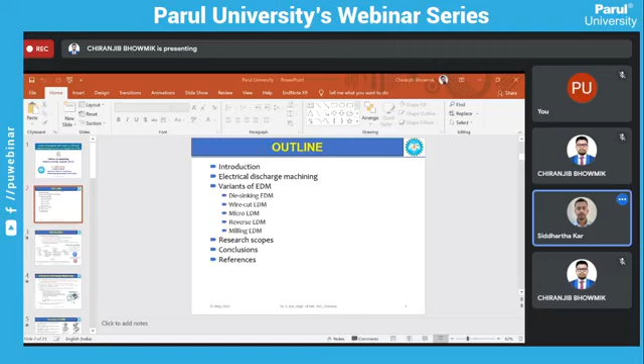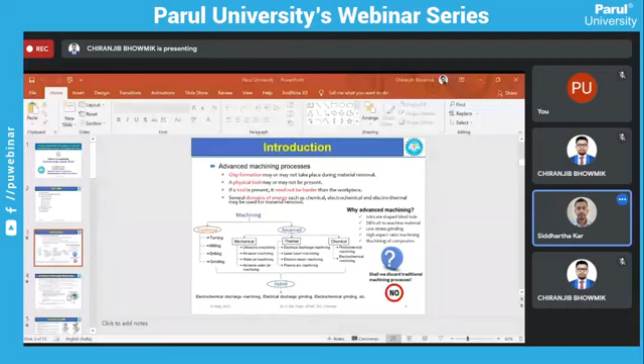Next. Is it visible? No, presentation mode is not active. Slides are visible, but it is not in slideshow mode. Right now visible? No, it is not visible to me. Sir, can you present yourself from your mobile or whatever your device? Okay, I'll try, yeah sure. Wait. My screen is visible. Yes sir, screen is visible. Okay.

Okay, so by advanced machining process, what do we mean? There are few important characteristics that differentiate advanced machining process from the conventional one. The first one is that chip formation may or may not take place during material removal. There are few advanced machining techniques such as laser beam machining and electron beam machining, where we don't find the formation of chips after material is removed. Now there may be a physical tool present or not, but in all conventional machining techniques, a physical tool is a must, and it should be sharper and harder than the workpiece.

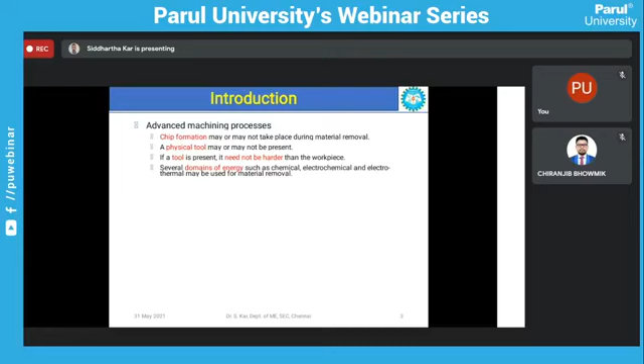We can distinguish the several machining techniques in traditional and advanced, as given in this pictorial representation. In traditional, we see common techniques like turning, milling, drilling, grinding. In advanced category, under three domains of energy - mechanical, thermal, and chemical - we see several processes. These processes can be clubbed together or hybridized to get complementary benefits of each other, so that machining efficiency is increased.

So several machining techniques are nowadays hybridized together, like grinding hybridized with electrical discharge machining becomes electrical discharge grinding. Then electrical discharge machining combined with electrochemical machining becomes electrochemical discharge machining. They are hybridized so that they complement each other, achieving higher efficiency in machining.

Now, why do we go for advanced machining? The answer is given in these five points: first, intricate shaped blind holes. If complex shaped holes are required in very tough and hard materials, it is not possible by conventional machining techniques, so we have to go for advanced machining techniques.

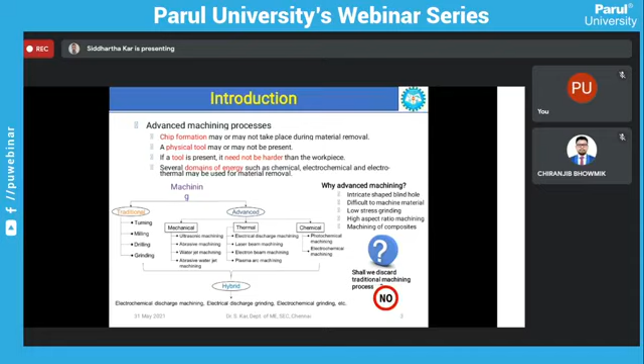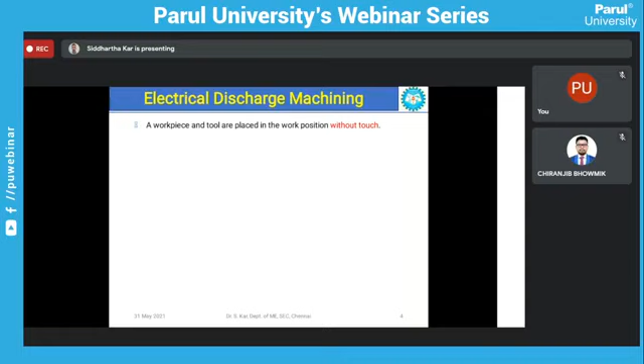Now, electrical discharge machining is basically a non-contact process where the workpiece and tool are placed in the work position. The tool and workpiece are separated by a gap known as the spark gap or inter-electrode gap. This is the operating principle.

As we can see, at the top side is the tool and at the bottom side is the workpiece. They are connected by a pulse power supply, and a sufficient gap is maintained so that spark can occur between them. The gap is filled by dielectric medium, which is used to ionize the gap. Whenever sufficient ionization energy is reached, it emits electrons, and when a channel of electrons forms, a plasma channel is created. When the plasma channel breaks, a shock wave is created where material removal takes place in the form of craters.

One important thing is that pulsating current flows between the power source, workpiece, and tool - a continuous power supply is not applicable in EDM. The main idea is to give sufficient rest to the working mechanism so that material removal may take place.

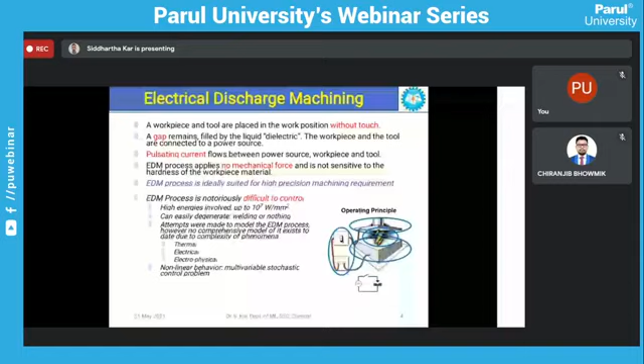It is very difficult to control, because the energy associated with EDM is very high. So it is very difficult to predict the working mechanism, or how much material erosion takes place under a given criteria. It is very difficult to predict.

It can easily degenerate to welding or nothing, if the process parameters such as current, voltage, pulse on time, pulse off time, the dielectric used, and the electrical and thermal conductivity of the workpiece and tool materials are not properly adjusted. If the adjustment of all these parameters is not beneficial for healthy generation of sparks, then the machining will not take place.

So it is very important that we select the process parameters such that proper machining takes place. Whenever we intend to do ED machining, we have to select the process parameters such that proper machining takes place. Otherwise, there will be no machining.

It is very difficult to model the EDM process. Basically, in every machining process, to establish some model or to predict something - that is, how much material will be eroded if we apply a certain combination of process parameters, how much material will be eroded, how much accuracy we can achieve.

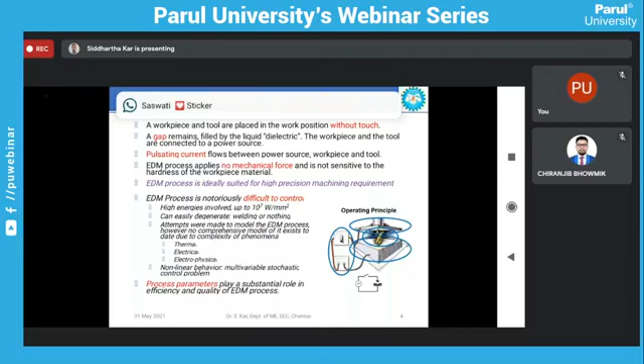Because we know in EDM, whatever process parameters we apply, there is the occurrence of overcut. So suppose if we use a tool of diameter X, then the outcome in the workpiece will be X plus delta X. This is a basic limitation of the EDM process.

So we have to play with the process parameters according to our requirement. Basically, we have to go for a trade-off between higher efficiency and higher accuracy.

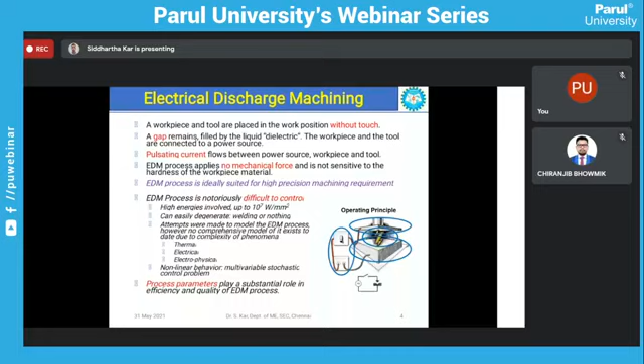There are several variants of EDM. Among them, die sinking is a basic variant of EDM, where the required shape is formed negatively in the metal or another conductive material using a three-dimensional electrode. So here we can see from the diagram, the impression of the tool is seen in the workpiece. Whatever shape the tool has, that shape will be reflected on the workpiece.

Then wire cut EDM, here the tool is replaced by a wire. We can manipulate the direction of the wire and create complex shapes or cavities in the workpiece. Then there is milling EDM.

Then there is reverse polarity EDM, which works on opposite polarity, with the motive of imparting more material removal from the tool material. Basically, in the EDM process, as we can see from the diagram, the tool is connected to the negative terminal and the workpiece is connected to the positive terminal, so the ultimate intention is that more material should be removed from the workpiece.

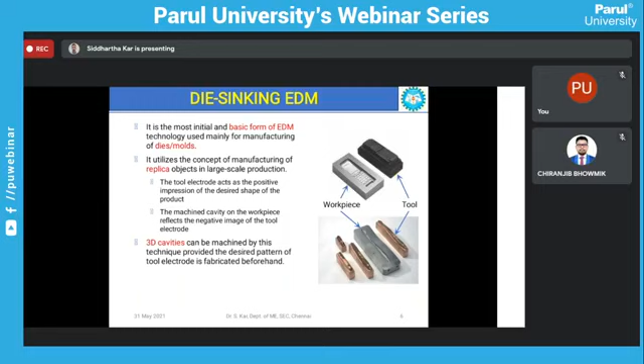Then wire cut EDM is used to cut metal pieces, where a thin wire is used as the tool electrode. Generally, two types of wires are there: consumable tool electrode and non-consumable tool electrode. The non-consumable type is used again and again till it breaks or till its lifetime finishes.

Then the pulse energy of wire cut EDM is generally high in comparison to micro EDM, but less than die sinking EDM. So wire cut EDM can be used to machine both macro cavities, and it is also used to machine micro cavities.

Then a wide variety of features can be machined by controlling the tool path movement. In wire EDM, if we can control the tool path, we can machine the shape which the tool covers. So any type of shape which we can feed to the tool, that is the wire, we can get that type of shape in the workpiece.

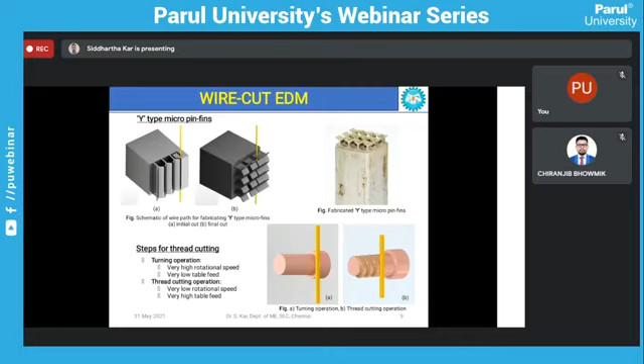At lower discharge energy, the effective unit removal of material is very less, leading to shallow craters, whereas at higher energy these craters prolong. Material is eroded in the form of crater formation in the workpiece. So with lower discharge energy, the crater size will be shallow, but if we increase energy, the crater size will be increasing. So to do micro machining, the crater size has to be minimum, and this can be achieved by supplying lower discharge energy.

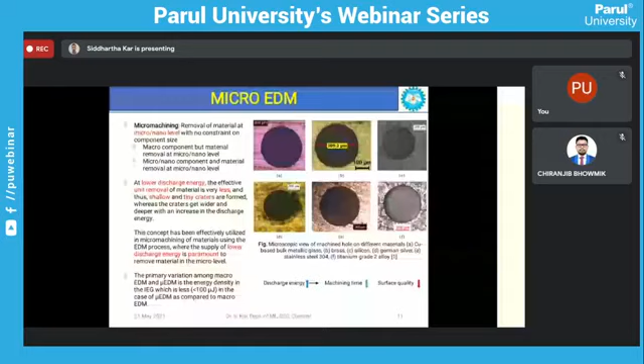Milling EDM uses a lateral movement of tool and workpiece in the EDM environment. Basically, a rotating tool is used, and it is first given a Z feed, equivalent to the drilling process, and then with that Z feed it is moved laterally in X and Y directions so that the intended shape can be machined.

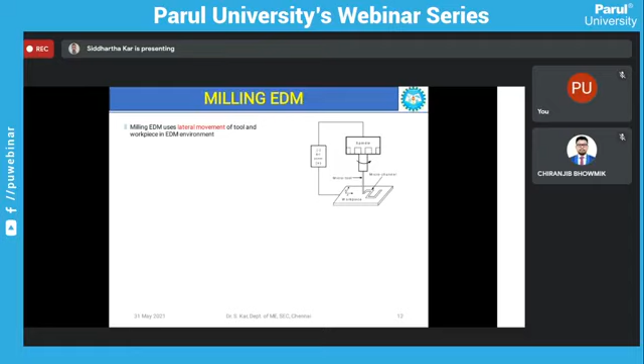The milling process eradicates the use of a structured tool. As we have seen in die sinking EDM, if we want to machine a complex cavity, first a complex shaped tool has to be fabricated before the actual machining process. But in milling EDM, a simple cylindrical tool can be used for machining complex shapes.

From the schematic diagram, we can see that at the start of machining, the tool length is, suppose, X, but at the end of machining, the length of the tool decreases. This is basically due to tool wear that occurs in each and every EDM variant. So we need to find ways to compensate this wear so that higher dimensional accuracy can be attained.

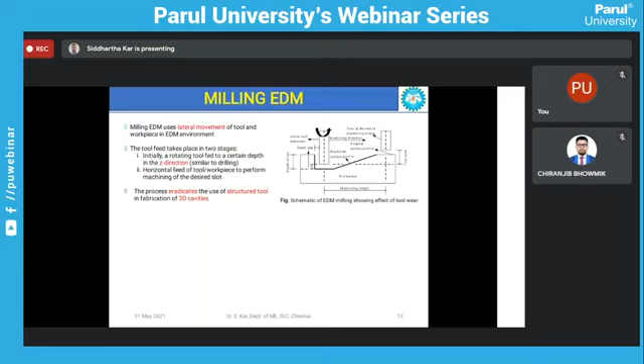In these workpieces machined by micro EDM milling process, we can see that at the start side of the milled slot, the length and width of the slot are as per our requirement. But at the end side, the length is very less and the width is also almost diminished. From the top view, as the milling slot progresses from left hand side to right hand side, the width of the slot starts decreasing, and will diminish.

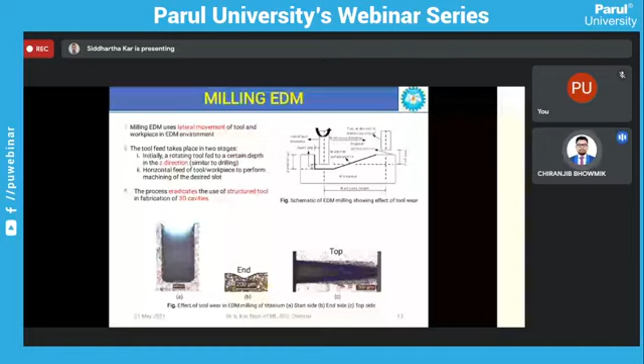Hello, Siddharth sir. You are not audible right now. Is it okay now? Yeah, right now it's okay. Previous slide I have to tell. Yeah, just go through a few things from the previous slide. Milling EDM, tool wear, that thing you discussed. Figures, remaining figures. Whatever the figures A, B, and C. Okay, so sorry for the disturbance.

To compensate tool wear, a simple technique of to-and-fro layer machining is used. Here, suppose we give a certain amount of Z depth at the start of the layer. To layer means we go from left hand side to right hand side, machining a slot from left to right with a certain depth. Then again, that equal amount of depth will be given from right hand side to left hand side.

By this technique we can compensate the wear of the tool that is occurring at the initial to layers. So by the fro layer we are compensating the initial wear that is occurring in the to layer.

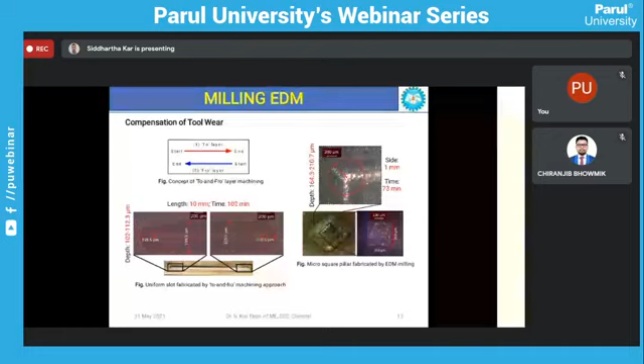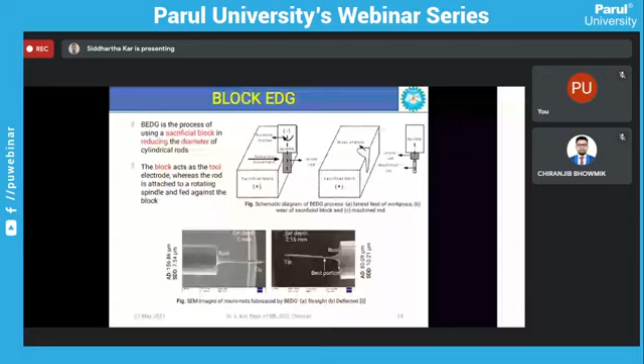Utilizing this technique, two micro rods have been fabricated. In the first one, the left hand side figure, a set depth of 2 mm is used, meaning the rod is fed for a total depth of 2 mm against the block.

Here we see an average diameter of 156.86 micrometers is achieved, and the standard deviation in diameter, from the tip of the tool to the root of the tool, is only 7.54 micrometers. This suggests that block discharge grinding can be used to fabricate very precise

micro rods. The set depth has been increased from 2 mm to 2.15 mm. We see the root portion has been bent and the tip is also deformed. This suggests that the tool has some mechanical contact, although the EDM process is non-contact.

There is very little gap between the workpiece and the tool, and moreover dielectric is also supplied, so chances of mechanical contact are also there. So we have to choose the set depth very accurately in order to fabricate micro rods with higher efficiency and without any failure.

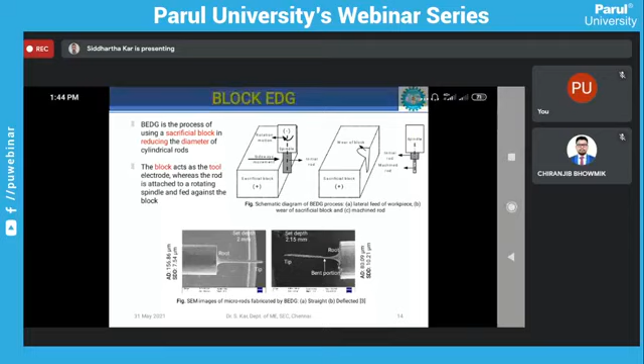Then the concept of reverse EDM is that the workpiece, in the form of a bulk rod, is connected through the spindle, whereas the tool, in the form of a thin plate sheet with micro holes, is kept on the work table.

Then again, against the same hole, if we feed a bigger size diameter rod with reverse polarity, meaning the rod will be connected to the positive terminal and the plate with the hole will be connected to the negative terminal, more material will be removed from the rod, and hence we will get a rod of diameter equivalent to the hole that was previously drilled.

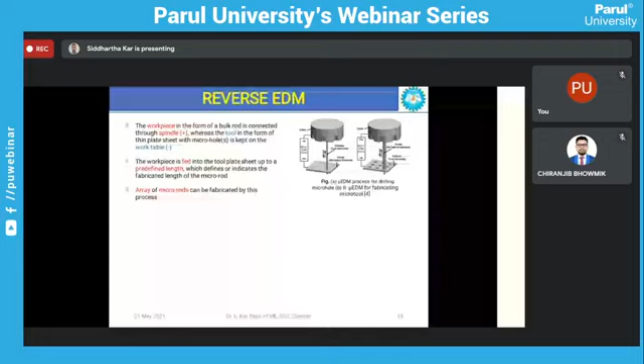But here we cannot apply rotation, it has to be just movement along the Z axis. So here we see that an array of 4 micro rods have been fabricated with the help of the reverse EDM process.

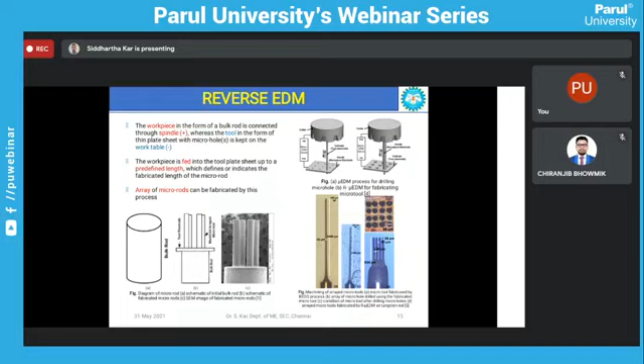And here also we see that a rod of 3.4 mm length and 55 micrometer average diameter has been fabricated, and arrays of rods have been fabricated by drilling holes with the initially fabricated rods.

Now the same reverse EDM can also be utilized for modifying surfaces. There are two important reasons which make EDM suitable for alteration of workpiece surfaces. These are that tool erosion is inevitable in EDM. Whatever compensation we use, whatever process parameters we use,

tool wear is bound to happen. And along with tool wear, the formation of recast layer in EDM is paramount. It has been seen that after erosion takes place, the material gets resolidified, and this resolidified layer is nothing but the recast layer. So these two phenomena have been utilized in a positive manner so that the surface of the workpiece can be altered according to the materials of choice.

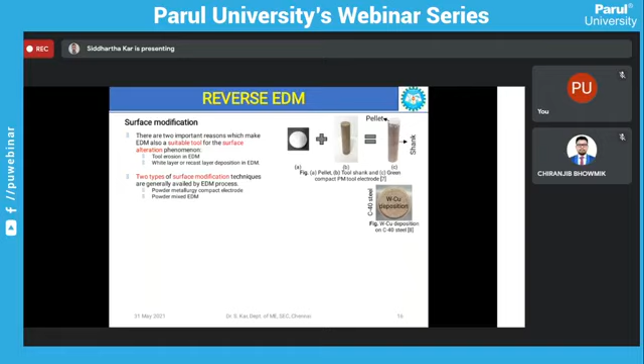In the powder metallurgy tool electrode, the pellet is composed of the powders that we intend to deposit over the workpiece surface. This is an example where tungsten and copper have been deposited successfully over C40 steel. We can see that a very thick layer of deposition has taken place over the steel surface.

If we see the phenomena of surface modification by powder metallurgy or powder mixed EDM, as represented by these several bubbles, we have the workpiece particle, the electrode particle, the powder particle, and the carbon atom. The carbon atoms are basically dissociated from the hydrocarbon oil, which is the dielectric medium. Dielectric mediums, hydrocarbon oils such as kerosene and EDM oil are used. Carbon atoms get dissociated from the dielectric fluid after it undergoes ionization, and these carbon atoms are also deposited over the workpiece and tool surfaces.

So basically three distinct layers are seen in the workpiece of the EDM process, as we can see from figure C. The first layer is the recast and oxide layer, then the heat affected layer, then the base metal. Material from the tool end, as we can see from figure B, will dissociate due to the formation of spark, and they will directly fall over the workpiece surfaces.

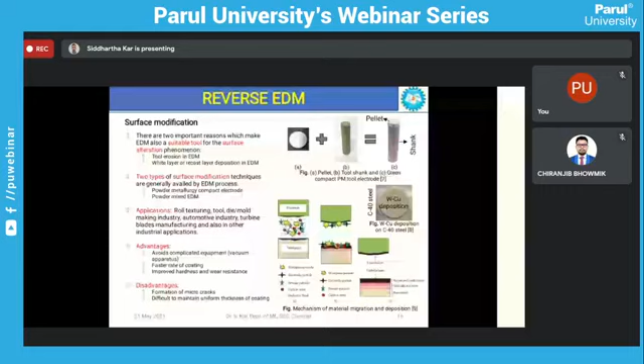Several masking techniques are there, like self-adhesive crepe paper, self-adhesive PVC, then photoresist and ultraviolet radiation. Those are used for photochemical machining. These techniques can be used for masking, and we can do selective surface modification by this technique.

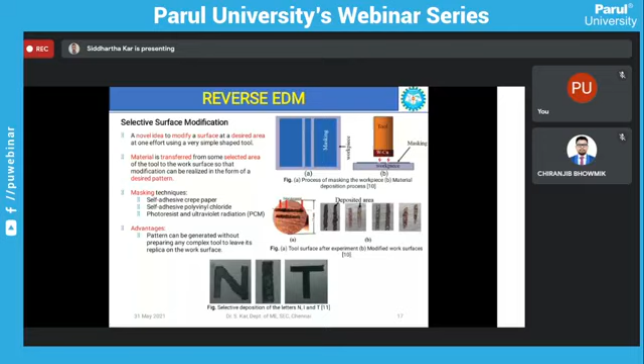Now for a stable deposition process, the rate of material deposition should be greater than the rate of removal. In EDM, the basic intention is to remove material. Now we are using the phenomena of tool material removal to our advantage, but the basic intention should be that when you are depositing, the tool removal should be more, from the ram side or spindle, whatever is attached, while from the workpiece the removal should be less, so that more material is deposited over the workpiece.

So to achieve that condition, we have to use a small pulse on time, that is the discharge on time.

Then in case of micro deposition, air has to be used, dielectric cannot be used, because it will just flush away all the deposited materials. And small current has to be used, that is the overall discharge energy has to be very less, so that only deposition is taking place and metal removal is very less as compared to the deposition.

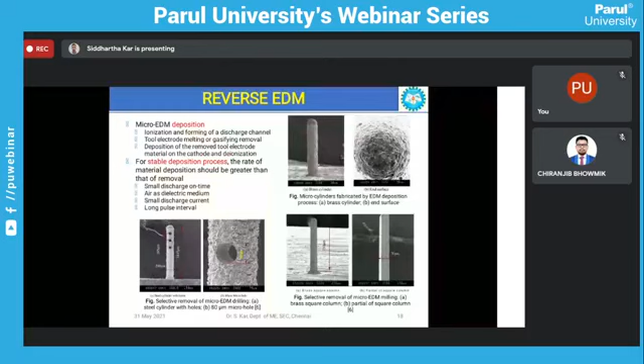Now we see that some post-processing techniques can also be done on this deposited microcylinder. In the left-hand side figure, drilling has been performed on the deposit. Then on the right-hand side, by performing milling, a square column has been prepared.

Now the post-processing techniques are done because, as we can see from the top right-hand side figure, the outer texture is not at all suitable for some sort of application. So to remove all these unintended burrs from the outermost surfaces, post-processing techniques of drilling and milling can also be done.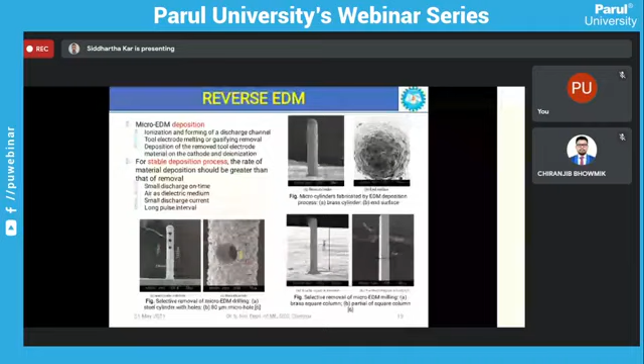Now there are a few research scopes that can be availed by us, so that we can further extend the scope of EDM and enhance its application for a wide range of materials. EDM can be hybridized with other machining processes to enhance process capabilities and minimize its weaknesses, so that the process can be applicable to a wide spectrum of materials.

Now it is only used for electrically conductive materials. If we can modify it, or hybridize it with some other processes so that it is also applicable for non-conductive materials, then only will it be more widely accepted by everyone.

So a few hybridizations already exist nowadays, that is EDM and ECM, commonly called electrochemical discharge machining. It can be used for machining of non-conductive materials, and it has been seen that both efficiency and accuracy are very high for ECDM.

Then electrical discharge grinding is also in existence. EDM can also be combined with PCM, as we have seen in selective surface modification. Research has not yet reached conclusive remarks such that we can say this process has been established. This is still in a premature stage, and we can do a lot of work combining these processes.

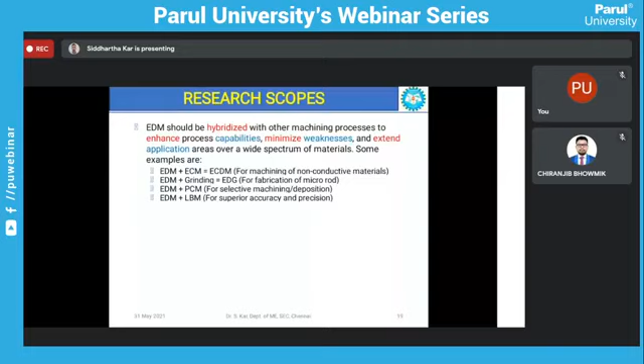Then EDM can also be combined with laser beam machining. Basically laser yields higher surface accuracy, so EDM can be used for mass removal of material, and laser can be used for increasing the accuracy and preciseness of the machined cavity.

One of the important demerits of EDM variants is the existence of tool wear. So tool wear needs to be compensated in order to achieve higher accuracy and precision. The main challenge in implementing tool wear compensation is a relative wear measurement issue. To implement it, we have to measure the material removal rate and tool wear rate, basically how much tool is wearing out and how much material is wearing out. If there is some problem associated with measuring this, then the whole compensation technique will be invalid.

So we have to meticulously measure all these wears in order to implement some sort of tool wear techniques very effectively.

Then process stability and reliability of prediction theory. Now, whether the process is stable or not, for that we have to do a lot of research. Suppose a new material comes into play. Suppose my processing condition for steel is XYZ. Now if I use aluminum, the same condition may not be applicable. So again, to implement some sort of tool wear compensation strategy, every time we have to do a lot of experiments in order to come to a conclusive point.

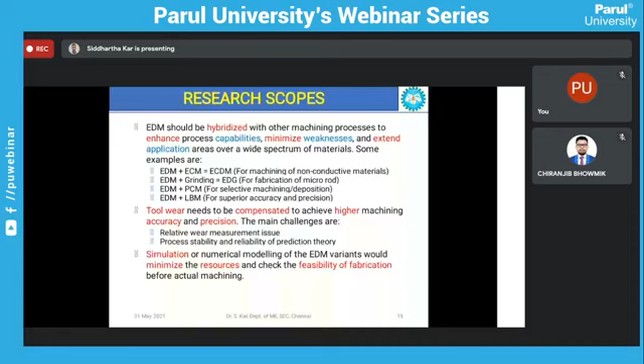Then simulation or numerical modeling of the EDM variants can minimize the resources and check the feasibility of fabrication before the actual machining. This is very important because to implement tool wear compensation strategies, there are a lot of hurdles. If we can simulate the model, then we can easily vary the process parameters and the materials, and evaluate the tool wear compensation we are implementing, because the experiment to prove it will take a lot of time. Through simulation or numerical modeling, we can save time and the resources associated.

Then simulation of normal EDM and micro EDM is in existence, with varied theories proposed by several researchers. Now, few of the topics that are not in existence till date are deposition phenomena by EDM, hybrid EDM, and also the effectiveness of the compensation strategy that I already mentioned. Whether the tool wear compensation strategy, if we use it, will be effective or not, that also can be evaluated in simulation.

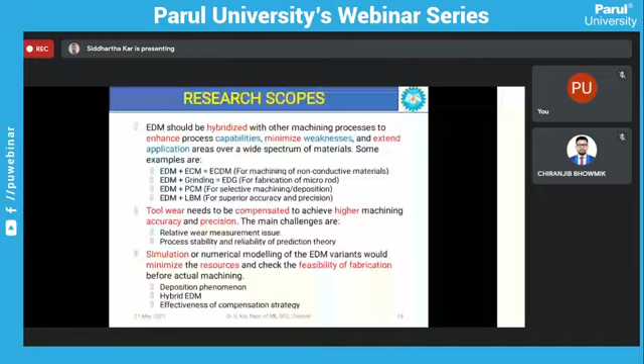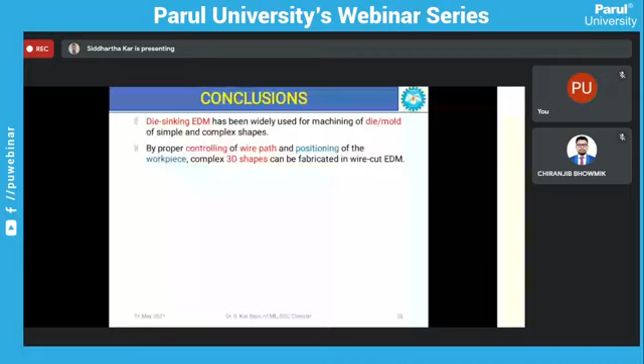So I can conclude the session with these points: die sinking EDM can be used, and has been in existence, for machining of die and mold of both simple and complex shapes. Then by controlling the wire path and positioning of the workpiece, three-dimensional cavities can be machined by wire cut EDM. Micro features such as micro hole, micro rod, micro pin, micro fin, screws can be easily fabricated by EDM. Then by milling EDM, we can fabricate three-dimensional cavities with the use of a simple cylindrical tool. To achieve higher efficiency and accuracy, proper process parameter setting and a trade-off between the outcomes is required. Then the research scopes of EDM have also been briefly elaborated.

As I have discussed, and as we are also aware, EDM is a well-established process, but further research is required in order to enhance its capabilities so that it can be used for fabricating micro or nano features with higher efficiency and dimensional accuracy. Nowadays everyone is moving towards micro fabrication and nano fabrication, but EDM is mainly used for macrofabrication. Although micro EDM is in existence, the research has not reached a conclusive stage, so more research is required in order to expedite the use of EDM so that it can be used for very precise machining.

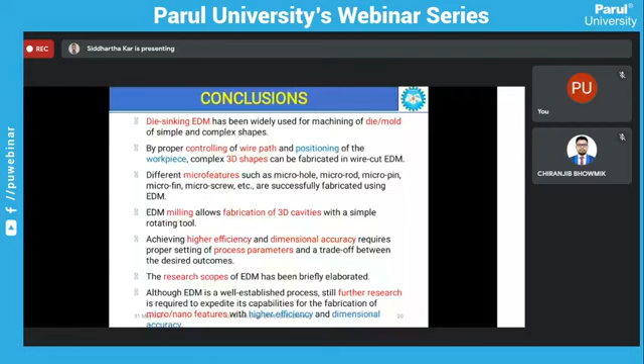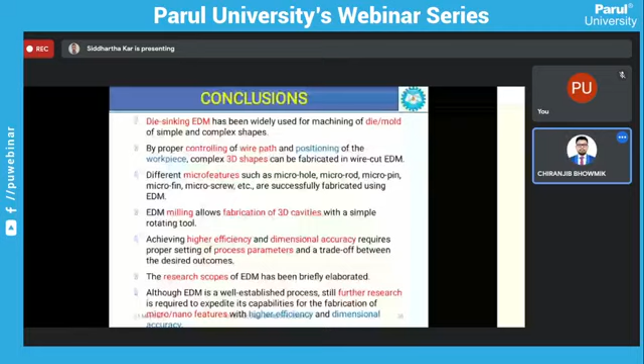Thank you. Thank you. Thank you. Okay sir, thank you. Now I am closing the session. If there are any queries, I will forward them to you and you can give your reply. Thank you, sir. Okay, thank you. Shall I exit the meeting?